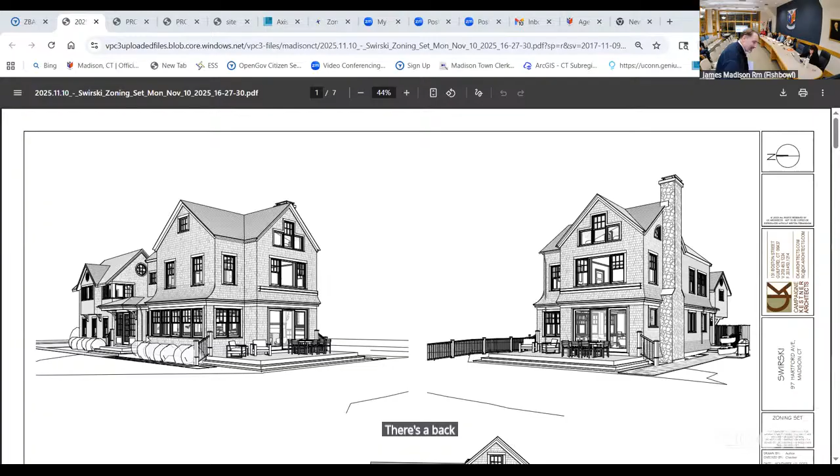The house basically consists of two portions. There's a back portion here. If you can go to the next page, actually, on the site plan, it's probably best. There's an existing portion here and then an existing portion here.

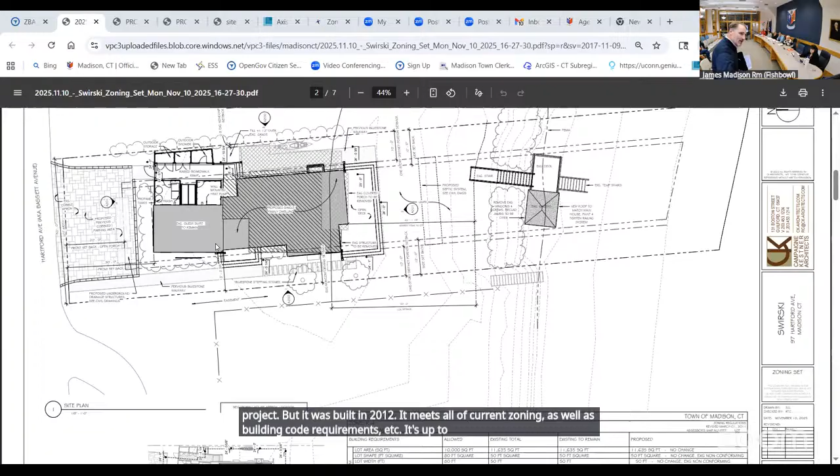This was built in 2012 as a two-story guest house. It has two bedrooms in it with a first floor guest suite that is important to the overall success of the project. It was built in 2012, meets all current zoning as well as building code requirements, and is up to energy code standards. So this is an asset that we don't want to have to deal with or take down.

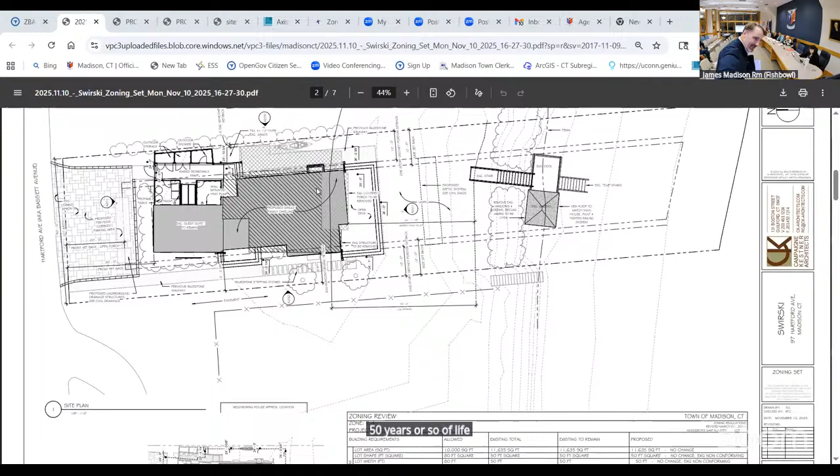The rear portion was built in 1895. There's been improvements over the years, but it's all set on a substandard foundation without really access underneath. There's a hole in the middle you can go down through the floor, but for the most part, it's built as a cottage from 1895, and isn't really in a position to be upgraded for the next 50 years or so of life. So we're proposing to take down the older portion that's on the water side and leave the 2012 portion.

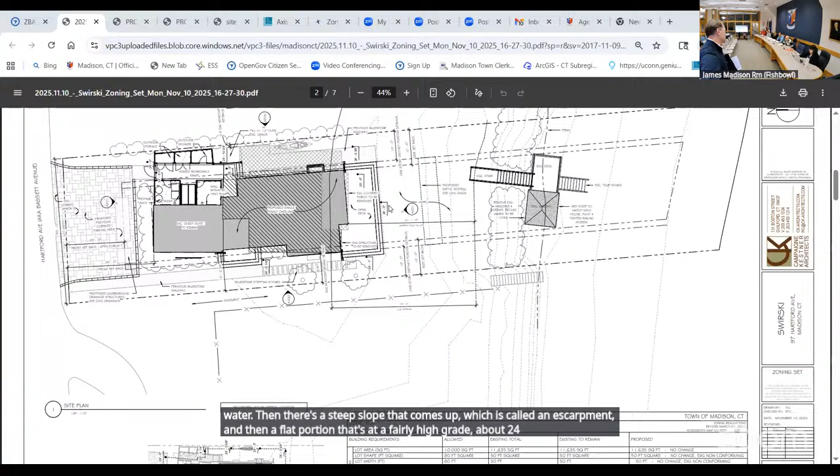Which is well constructed and worth keeping. To orient you, this is the coastal area, and there's a beachfront here, the water. Then there's a steep slope that comes up, called an escarpment, and then a flat portion at a fairly high grade, about 24 feet above sea level. So we're out of the FEMA zone and not having any trouble associated with that.

We've done our research in this area and found a code-compliant location for a 5-bedroom septic system that's replacing a very old dry well system on that portion of the site. During Irene, there was some beach erosion — this whole escarpment actually had some trouble along those lines. They made improvements and hardened it with a riprap lower course that actually made it survive Sandy with no damage. And there is a cabana, deck, and staircase down to the water that was previously approved, all kosher and fully compliant.

So the area of concern right now is associated with a change that occurred. The way that the DEEP recognizes the coastal area is that a natural escarpment is measured from the bottom of the escarpment — that's what the previous improvements were ruled under. Once there's a modified escarpment, once you do any modification with riprap reinforcement, the measurement point goes to the top of the slope. So the coastal setback from the critical coastal resource moved to the top of the slope when they made those improvements after Irene.

And so from the top of the slope to the house, the line actually moved into the existing house footprint. Now, there is a clause in the zoning that allows you to modify the second story within the 50-foot setback, but you have to keep the exact same footprint — you can't modify the footprint of the house within that area. That was very constraining to the way it was laid out, especially since the existing footprint has a porch on this side that's only 0.9 feet off the side property line, very non-conforming.

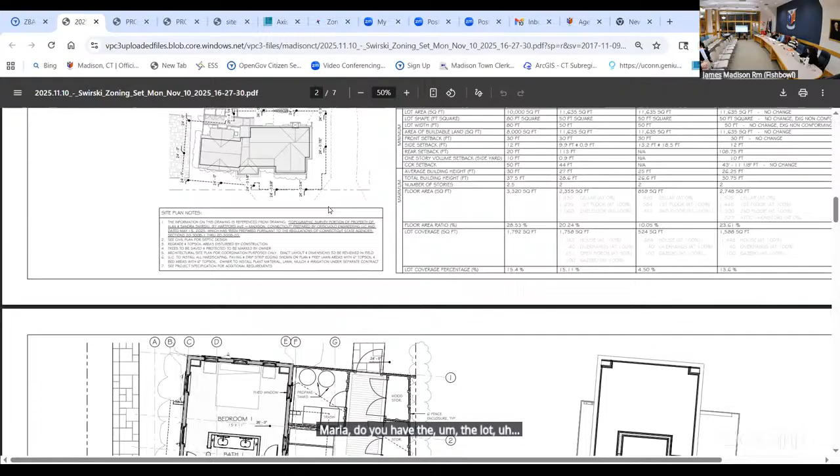All right, okay, Maria, do you have the lot, the exhibit that shows all the lots? Yes. I forget what that's called, sorry. The GIS map. Oh, was submitted. Is that what it's called, GIS? Yeah, that's from your GIS.

The hardship information, I think, is right here, isn't it? Site photos. So you can see how narrow this lot is compared to the adjacent lots all the way up and down.

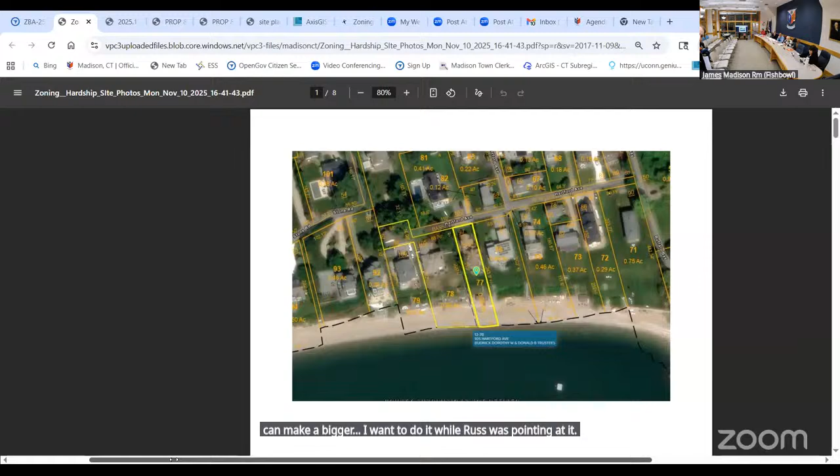No, I can make it bigger, just didn't want to do it while Russ was pointing at it. I have good glasses. Just keep it closer, just put it right in front of us. No, that's good, thank you.

So you can see really all the way down the line, this one is even smaller. So really, we're the smallest lot by quite a bit. Most are either 1.5 or some of them as much as 2 or 2.5 times larger than us. So that is a real constraint on this particular property in this area. Thank you. And you can also see there really is an alignment with adjacent buildings.

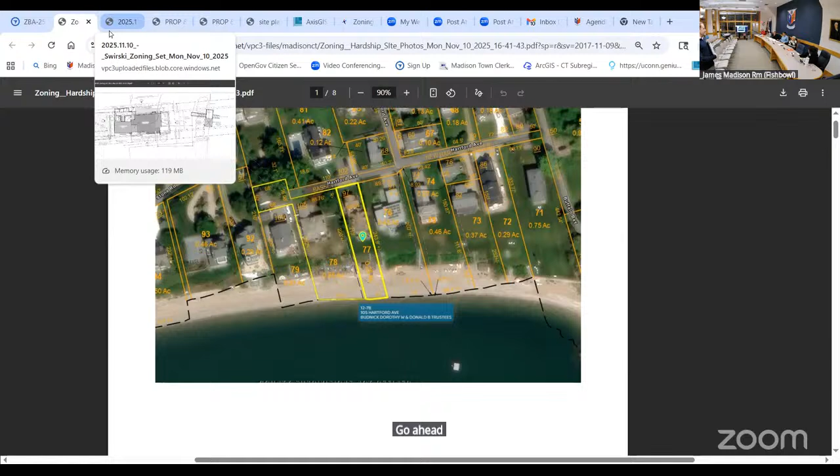I can show you more about the architecture of the building and how it looks from the outside, but I don't know if you're interested in that, I'm just trying to be mindful of your time. No, go ahead - I was just going to ask about the coastal site plan. We can do it at the same time. I'd like to go over what the wording is on the application, what the hardship is, and then the coastal site plan with a summary of what's on there.

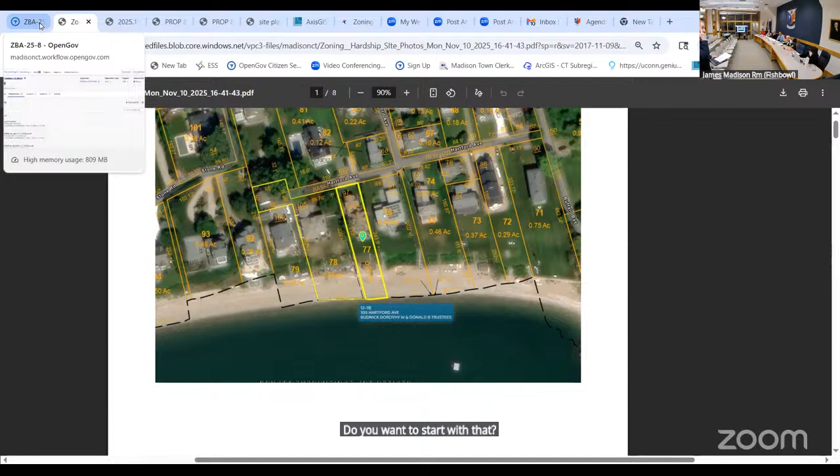Okay, do you want to start with that? Do you want to start with the application? We'll go through it, yeah, application, please.

So the summary is to demolish a waterside portion of the existing structure, leaving 859 square feet in the existing 2012 two-story portion, and adding approximately 1,895 square feet on 2.5 stories of construction on the waterside to create a 5-bedroom home. Two of the bedrooms are in the existing structure, and we're adding 3 bedrooms in the new. There's also a ramp, lower than 18 inches, some storage areas, a deck, an outdoor shower, as well as a code-compliant septic area and stormwater drainage. That's the scope of the project.

So the variance requested is 6.5 feet of relief, or 43.5 feet where 50 feet is required for the coastal resource setback. That's measured from the top of the slope per DEP standards.

This describes what happened during Tropical Storm Irene, when there was some damage done to the escarpment. We were able to repair it, but in doing so it actually changed where the setback line was measured from by definition - it moved from the bottom of the slope at the edge of the beach, which is the resource, to the top of the escarpment once modified. This was new territory for both Jim Pretti and myself - there aren't many escarpments in coastal Connecticut, and we learned this the hard way. We were under the impression we didn't need a variance, and this suddenly showed us that we did. So it moved the setback line to the top, accounting for steep slopes and the beach. That's the summary of that.

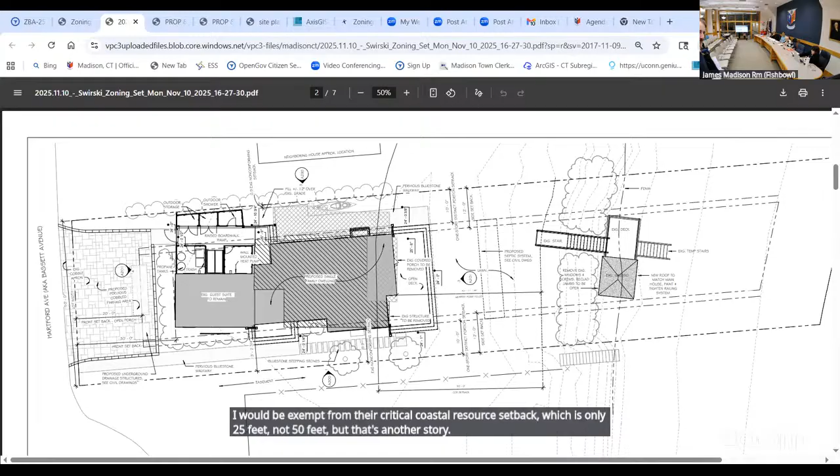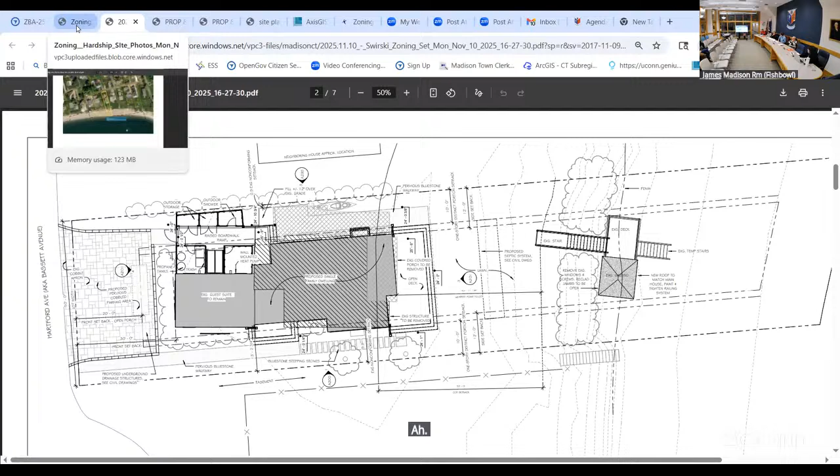Okay, Jim, do you want to take that on? Yeah, can you hear me? Yes, okay good. Jim Pretti, Criscuolo Engineering. I don't know, Maria, could you put our site plan up?

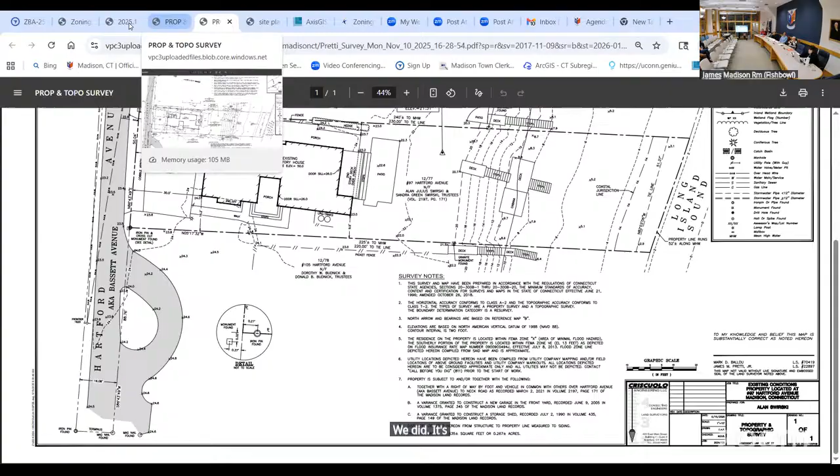Done. Well, there's the survey. Is it this one? It would be the next one, I think. Unless he didn't include ours with it. We did, it's there. Which one is labeled? Yeah, if you go back to that, I'll show you. POB site plan. Yeah, yep. Yeah, the notes - not the notes, the next one, that one. There you go, there you go.

Good evening, Jim Pretti, Criscuolo Engineering, 420 East Main Street in Branford. Incidentally, to Russ's point, most of my work is in Branford, and Branford's also 25 feet critical coastal resource.

In any event, you can see on the plan here in the circles, we labeled the critical coastal resources as they show on the mapping that DEEP published. The shoreland, the S, is the shorelands, which is up above the flood zone line. So pretty much all the activities are up in that shoreland area.

ME is the modified escarpments, and then the coastal flood hazard area at the bottom, and beaches, and then out in the sound, because we have to show adjacent - there was intertidal flats, and I forgot what the E was. Coastal bluffs, yeah - there's other coastal bluffs, I guess, nearby that have not been modified.

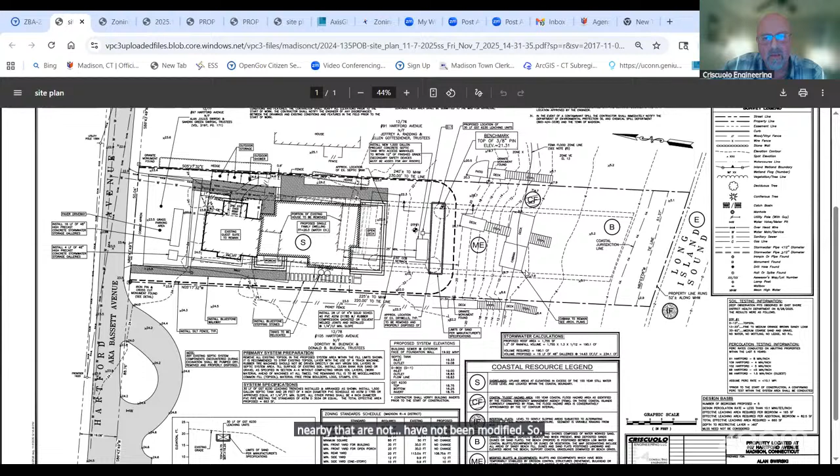The proposed project does not conflict with the coastal policies identified in the application, and is therefore consistent with their intended purposes. There would be no potential adverse impacts to the coastal resources that would result from the project. In fact, the coastal resources would be further protected by replacing the septic system with a new code-complying leaching area and septic tank, and the coastal resources during construction would be protected by standard erosion control measures typically used for these kind of jobs - silt fence and construction entrance and that sort of thing.

It's pretty, from a coastal site plan perspective, this is pretty simple because the disturbance is all really within the area that's already been disturbed.

I will say we're also adding and capturing roof drainage on the property with 2 dry wells that will be installed, that aren't there now. Everything is running over land right now, so those are going in underneath this as part of the new requirements. Correct.

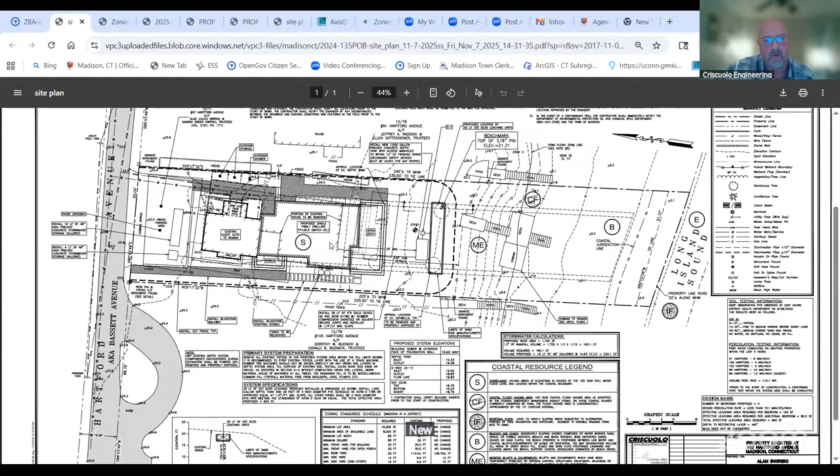Any questions? Do we have like a DEEP response or? No, nope, it was sent to DEEP and they did not respond. I even sent them a reminder last week.

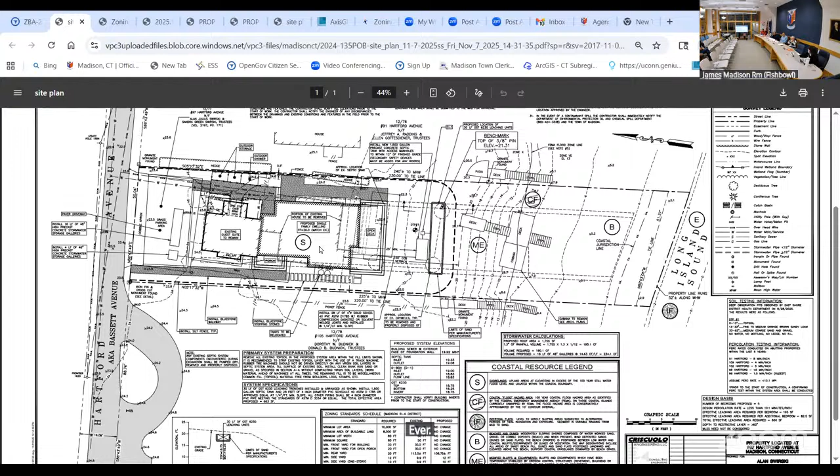Whoops. There we go.

That first one just lists the coastal resources on or adjacent to the site. If you scroll down, it's a residential neighborhood. There's a description of the project that Russ has already gone over, including roof runoff into the new galleys under the driveway. Again, these are the coastal resources, showing which are on site and off site.

Oh my, okay. That's what I've already read there. We do not conflict with any of the coastal policies in their manual. Again, we're protected by erosion controls. It's not a water dependent use, and we're not preventing any water dependent uses. I don't know what else is on here.